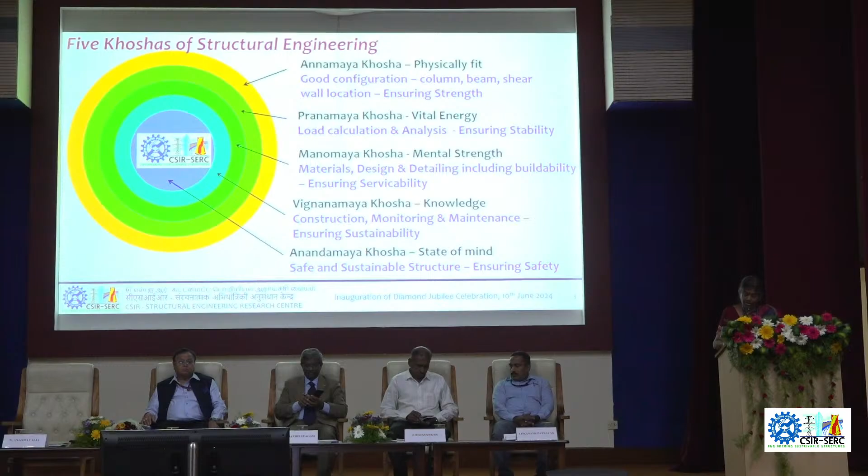Our aim and goal to provide safe and sustainable structures is the inner layer, which can be achieved through good configuration and by ensuring strength at the first layer, while load calculation, analysis, and ensuring stability form the second layer. It is important to ensure serviceability and use appropriate materials, design and detailing - this is the 3rd layer. It is essential to monitor and maintain the structures after construction so as to ensure sustainability. So these are the 5 layers of structural engineering towards achieving safe and sustainable structures.

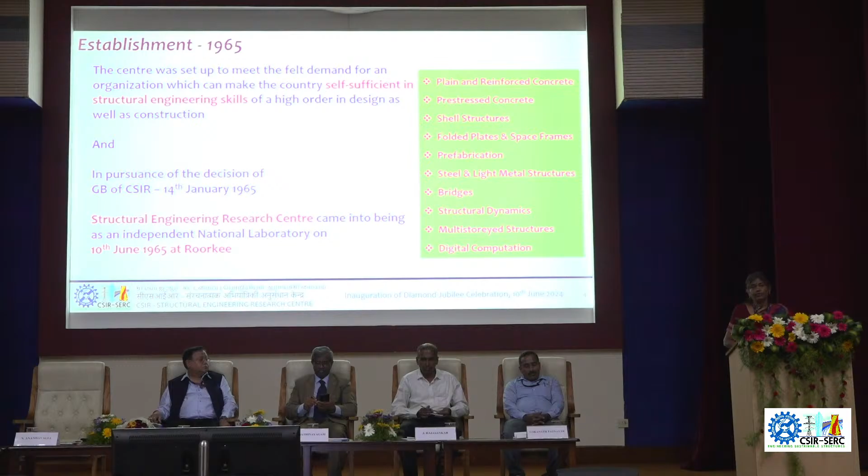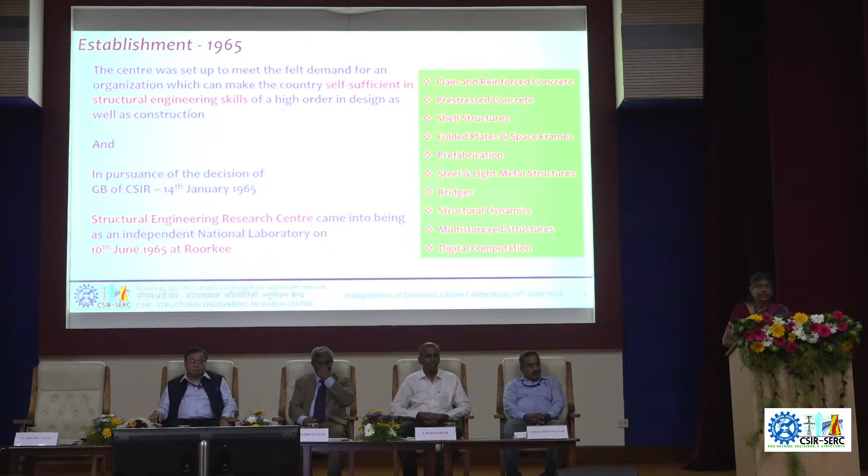As Dr. Bharati Priya was telling, the journey of CSIR-SERC started with the thought process of Professor G.S. Ramaswamy, our founder director. It was built upon a far-sighted vision with the aim to have self-sufficiency in structural engineering skills, and was established on the 10th of June 1965 as a national laboratory under the CSIR Ministry of Science and Technology at Roorkee.

It was felt that a regional cell in the southern part of our nation was essential, and it was established on this campus with other regional units of various CSIR laboratories in early 1969, and transformed into a full-fledged center.

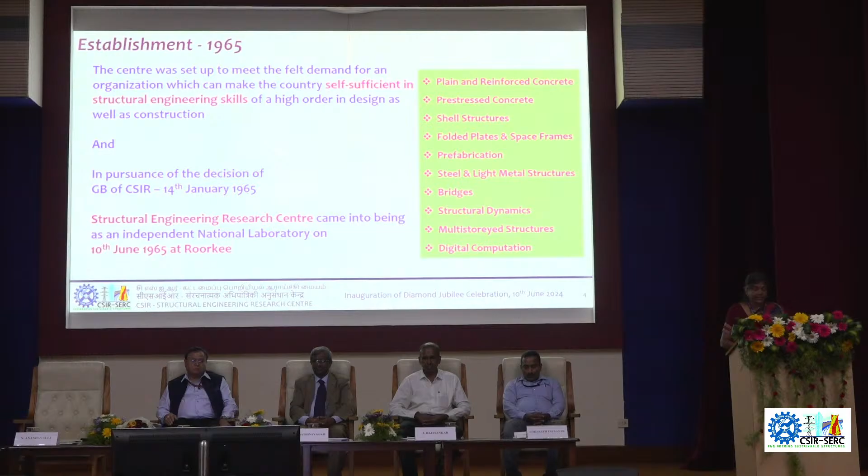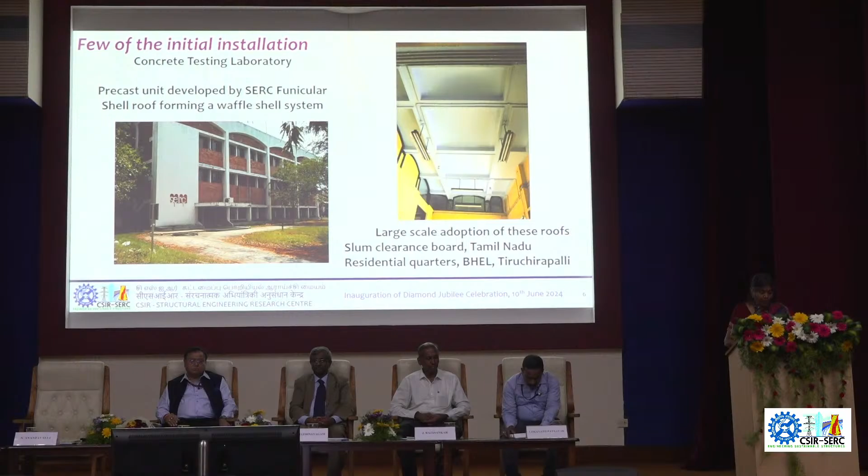Each of the structures in this campus has a technical story behind it. The first few buildings, such as the concrete testing laboratory, have a funicular shell roof developed by CSIR-SERC, and the heavy testing laboratory has a brick shell roof. The heavy-duty floor of this laboratory was reinforced with deformed grip bars, also developed by CSIR-SERC and commercially produced by Tata Iron and Steel Company, which generously donated 50 tons for this work.

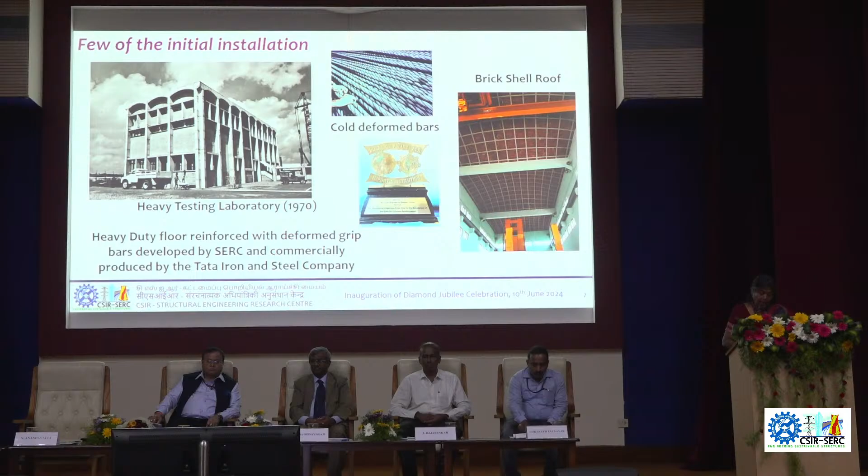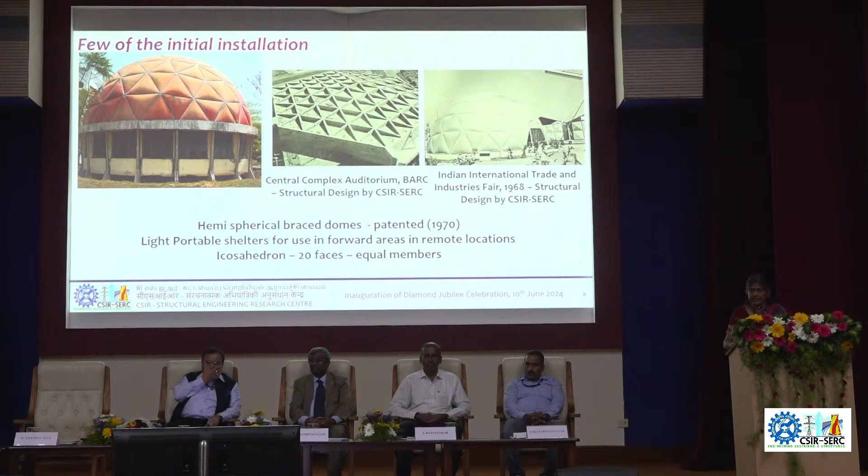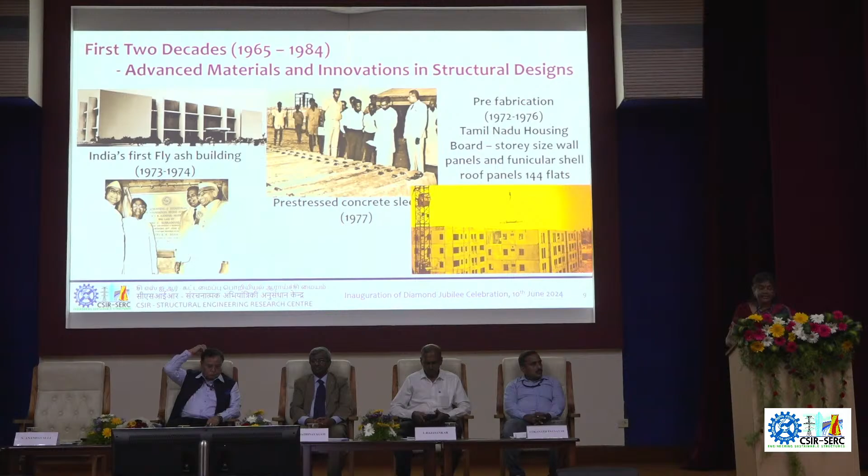Throughout the journey, CSIR-SERC has been contributing to solving structural engineering issues. To name a few: high-strength deformed bars aiming at import substitution, pre-stressed railway sleepers towards a green solution, India's first fly ash building with about 30% replacement of cement with fly ash way back in the 1970s, pre-stressed hyperboloids, and prefabrication in the early 70s.

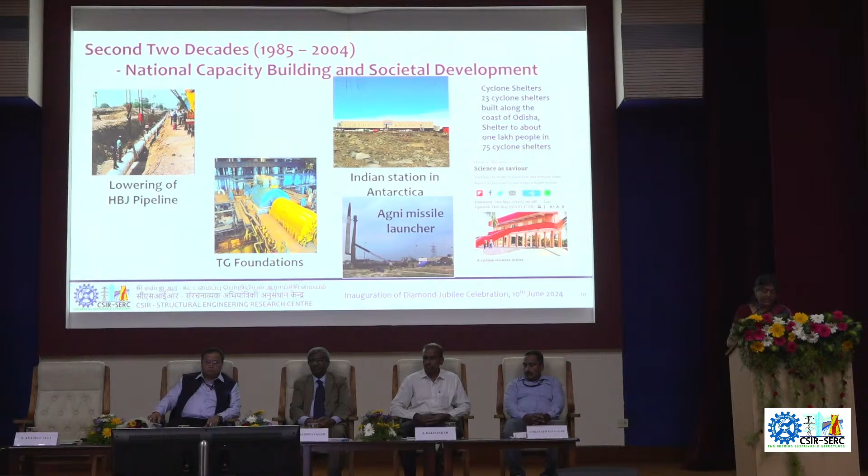In the second two decades, towards nation building and societal development, a few contributions include the aerodynamically shaped cyclone shelter adopted for the Odisha super cyclone—23 such shelters were installed, and they save more than 40,000 lives every year—as well as addressing various vibration issues of turbo generator foundations and lowering of in-service pipelines. In the next two decades, we concentrated on interdisciplinary research and development.

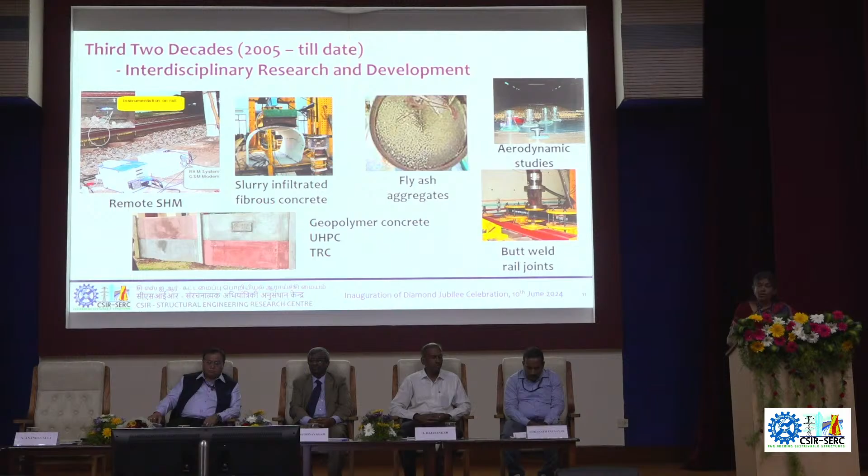In recent years, scientists of CSIR-SERC are focusing their research on six thrust areas, namely structural health monitoring, disaster mitigation, advanced materials for sustainable structures, special and multifunctional structures, offshore structures, and energy infrastructure.

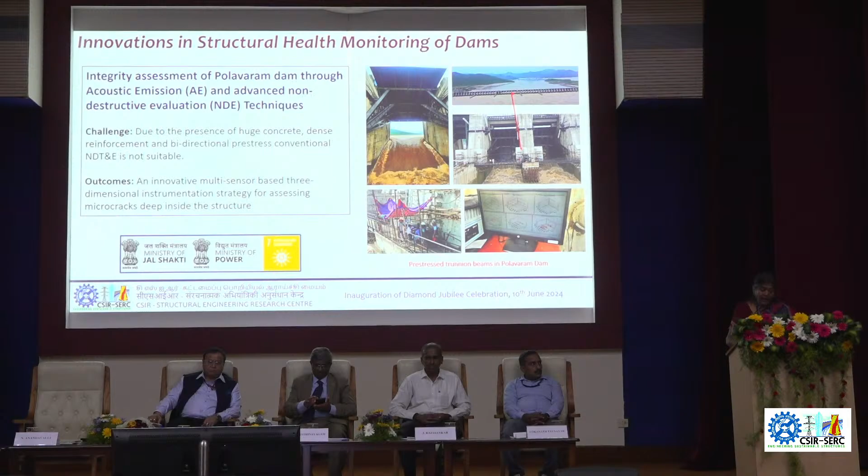Recent scientific and industrial contributions include integrity assessment of Polavaram Dam through acoustic emission technique and advanced NDT techniques, testing of LCH external auxiliary fuel drop tank, type designs of high capacity explosive storage structures, and development of indigenous emergency retrieval systems for power lines.

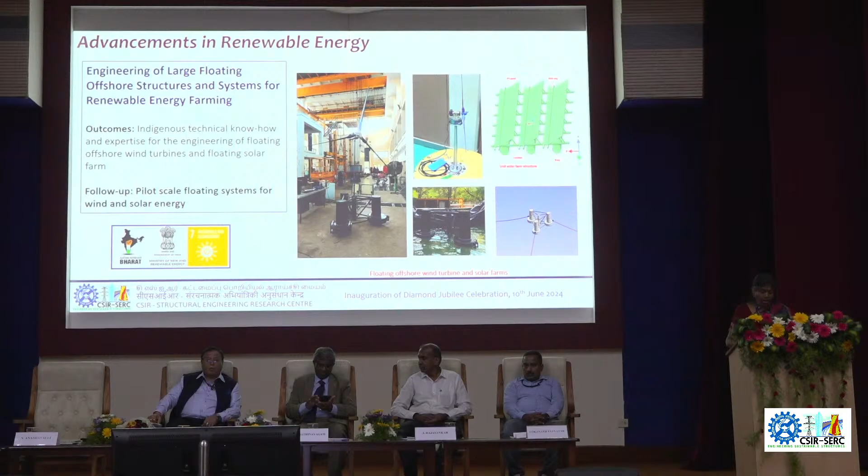Indigenous know-how on engineering of floating offshore wind turbines, floating offshore platforms, and solar platforms. Dissipative fuse links, textile reinforced concrete products, mathematical formulation of phase field method, 3D printable various concrete mixes including fibers, geopolymer, and ultra high performance concrete, condition assessment of RCC structures of Tapovan Vishnugad hydropower projects, and design of semi-buried hardened aircraft shelters.

A compendium of projects carried out by CSIR-SERC for various sectors is being released today.

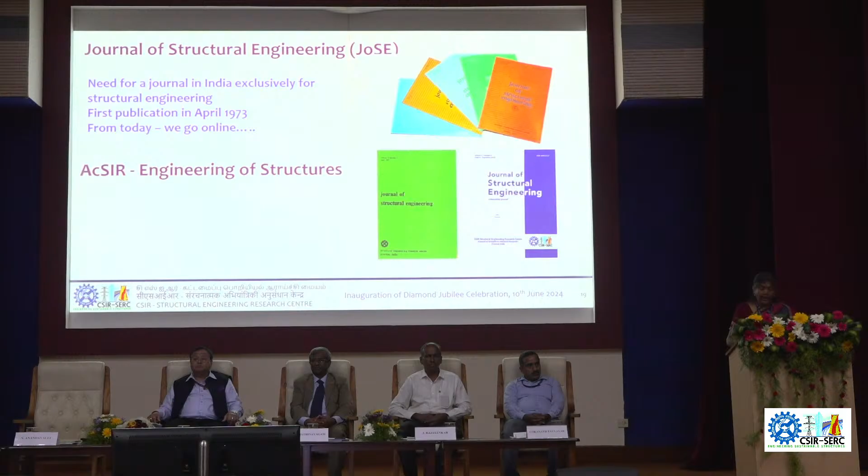I am proud of each and every member of my CSIR-SERC team. I am happy to share that 25% of the scientists, 60% of the administration staff, and 75% of the finance division staff are women. Today is a day as we cherish our achievements.

We need to put ourselves on a much higher platform so that we will become a global benchmark. We need to be competitive for ourselves.

My dear brothers and sisters of this campus, a person with far-sighted vision, Professor G.S. Ramaswamy, has founded this institution, and former directors Dr. Ramaya, Dr. Raman, Dr. Apparao, Dr. Lakshmanan, Dr. Nagesha Iyer, and Professor Santosh Kapuria, along with staff members, have made a strong foundation upon which we stand today. It is our duty to pay our gratitude to them by keeping the campus vibrant with our outstanding scientific contributions.

Thanks are due to Dr. R. Narayanan, Dr. A.P. Mandal, Sri Shyam Shetty, Dr. K. Ramanjaneyulu, and Dr. Rajashankar. We owe to our research council members for their broad R&D policy, guidelines, and directions from time to time. We acknowledge our clients and industry partners.

I'm confident with my smart people - simple and systematic, manageable and mindful, adaptive and active, realistic and resourceful, trendy and time-conscious - we will attain our pinnacle.

This year being the 60th year for our organization, we are planning a year-long celebration with various events. To commemorate, a logo has been designed and will be released during this function. As part of the Diamond Jubilee celebration, a conference on monitoring, assessment, and predictive maintenance of critical infrastructure, IMAP 2025, is being organized during January 22 to 24, 2025. The release of the conference flyer is also planned during this function.

Now we are in the renewable regime. India has set a target of 500 gigawatts of renewables by 2030, which is a very huge target. In 2014 it was just a mere 20 gigawatts, and they announced 175 gigawatts by 2022. But now, after COP26, the Honorable Prime Minister has announced 400 gigawatts, and now 500 gigawatts by 2030. That's the target of renewables, and we are fast tracking towards that.

Some of the structures you might come across in future would be offshore towers, floating and fixed, very tall wind turbine towers of 120 to 150 meters, and very large wind turbine blades, currently up to 60 meters in India, while in the world it is about 130 meters. India's largest floating solar project is in Kayamkulam, Kerala, one of the largest at 101.6 megawatts.

What are the challenges in traditional energy engineering? Why do we call it energy engineering? Any form of energy requires structures - pressure vessels, boilers, support structures, foundations, towers, and blades for wind turbines, and so on. Traditional energy structures had limited sustainability because resources are limited and resource dependent - fossil fuels will be depleted soon - and they have high environmental impact, causing high pollution on the ground.

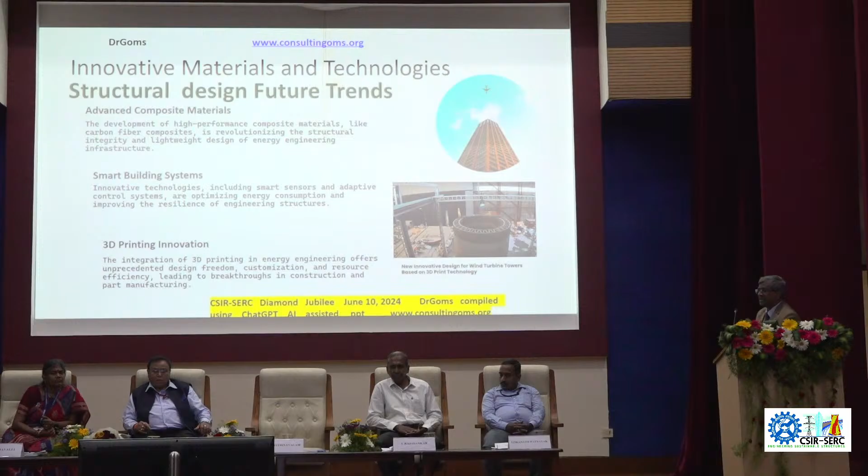Innovative materials and technologies in structural design for future trends - advanced composite materials are being used now, and smart building systems will be there because green buildings require embedded sensors in building materials, and net positive energy management of the building has to be ensured. 3D printing - SERC has already demonstrated 3D printing innovation at a small scale, and it will be in prototype soon.

Then we have energy efficient strategies. For green buildings and energy efficiency, you need support structures and sensor supports that function and meet all functional requirements, along with passive design solutions with low energy consumption, for which structural forms and design are important. Then we need IoT-enabled devices with embedded sensors, which will improve operational performance, easier maintenance, and energy engineering systems.

Above all, we need synergy from CSIR-SERC with the National Institute of Wind Energy, National Institute of Solar Energy, National Institute of Bioenergy under the Ministry of New and Renewable Energy, along with the International Solar Alliance, one of the topmost apex bodies in the world, headquartered in India. In future we need to ensure P2P, person-to-person energy sharing within connected communities, because energy will be digitally managed - no more analog distribution systems, it will be controlled by digital networks.

Offshore wind power developments are very fast. Most of the countries which are dominant in offshore wind energy exploitation have taken about a decade or so to set up their first offshore wind farm.

We also started in 2010 with offshore wind energy discussions with Scotland, and now we are in a position to release a tender for Tamil Nadu, 4 gigawatt, leasing 1 square kilometer of seabed for the highest bidder, for seabed survey, marine biodiversity surveys, and other related activities involved in offshore wind power development.

All the surveys have to be completed, seabed exploration done, and suitable foundations designed. We can think of one machine with 15 megawatts and a 236 meter diameter blade - that's such a long blade. One machine gives 15 megawatts. That's the order of scale of development nowadays.

This is a large wind turbine blade under test in Denmark, at the Blaest company. The testing happens in the ambient outside environment, and the vibrator simulates fatigue stresses on the blade to assess its fatigue life.

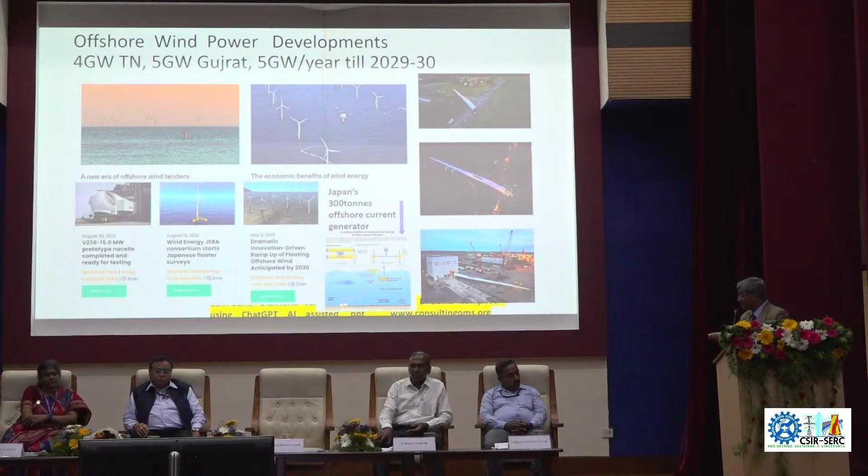Another important thing is, when you design the blade, it has to be designed for logistic transportation along roads, to be taken through a barge, and installed at a site in the offshore industry. So there are several things structural engineers have to think of even at the design stage.

Offshore wind farms cannot be accessed as and when required to rectify defects. They have to be very highly reliable, and access is limited because it is seasonal - you have to wait for the sea to be calm before addressing a defect, or go through a helipad and so on. So digital twins is going to solve these overall problems.

Future outlook includes emphasis on energy decentralization through microgrids - we'll come to that in the next few slides - and integration of AI and machine learning in predictive energy management, smart grids, and so on.

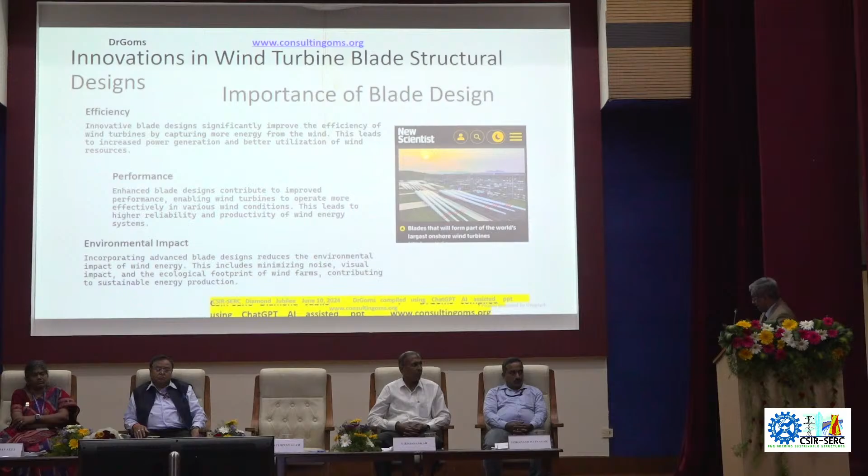Innovations in wind turbine blade structural designs largely depend on structural engineers building in efficiency in the blade, aerodynamic design, as well as structural design. With high performance, you get more energy captured, and the environmental impact will be less because noise will be reduced and bird or bat deaths will be fewer. Other challenges in traditional designs, like fatigue and manufacturing complexities, are now being overcome with innovations.

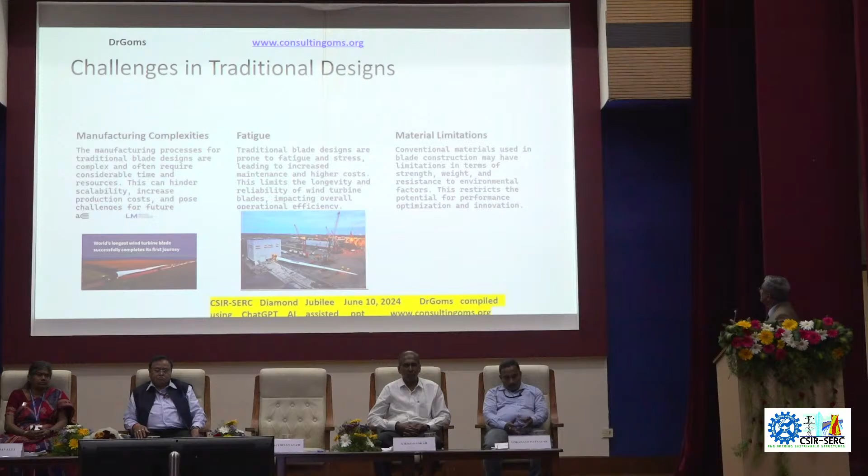Conventional materials used for blade construction may have limitations in strength and weight, and nowadays we are using carbon fiber material advancements, smart polymers, and morphing of blade profiles inspired by large sea animals and aerodynamic bird wings. Design enhancements integrate both technologies and digital manipulation of stresses in the blades - you can embed fiber optic sensors inside the blade during casting and monitor it 24/7.

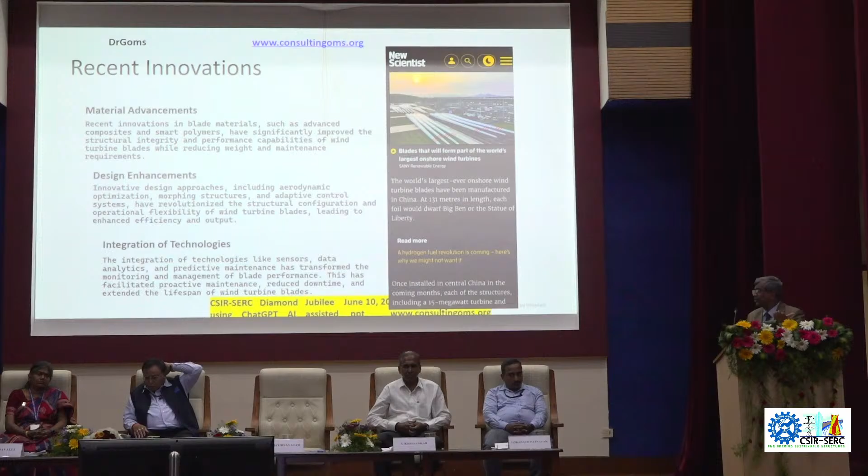These are all the gains you'll get from such innovative designs: if you use advanced composites, the performance increase is about 12%. Morphing blades can increase performance by 18%. Smart polymers can increase performance by 15%.

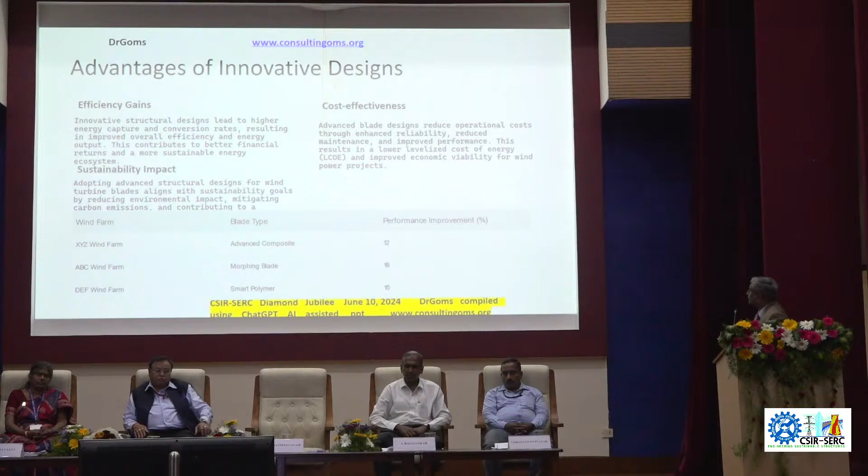So structural engineers have a large role to play in the future, not only in blade design and efficiency building, but even after the end of life use of the blade. Denmark has showcased how you can repurpose end of life blades into bus shelters, through integration and collaboration. This will be coming in the future, and it also requires structural qualification, because it involves the public being sheltered in these bus shelters.

Then there are challenges in traditional support systems.

Onshore, we have seen the height will be limited, the length of the blade will be limited to transfer through rural roads. Offshore, that limit will be obviated, because you can create in the factory coastal area and unload any size of the blade, any size of the tower, any weight of the nacelle onto the barge and go to the site to install and commission.

So all these sustainability and environmental impacts must be addressed. In India, there is only one or two companies supplying tall reinforced concrete towers for wind turbine supports, but there will be 30% cost saving than steel. You can build and reuse concrete towers built in forests, because you can take only the materials without cutting trees, then erect an in-situ or precast concrete tower. The same tower can be used when you want to upgrade the machine, because its life is durable and long lasting. So 30% cost saving there.

Beyond 70 meters design, it could be 30% saving. Then enhancements in offshore wind turbine supports - we need factories on the coast so that you can load out like 3,400 tons topside, which is a substation, supported by 1,400 tons of jacket. It should be corrosion resistant, and floating platforms are also going to be used. Adaptive foundation systems like friction bucket and suction bucket systems will adapt to the seabed shape automatically. All those things are going to be the challenge.

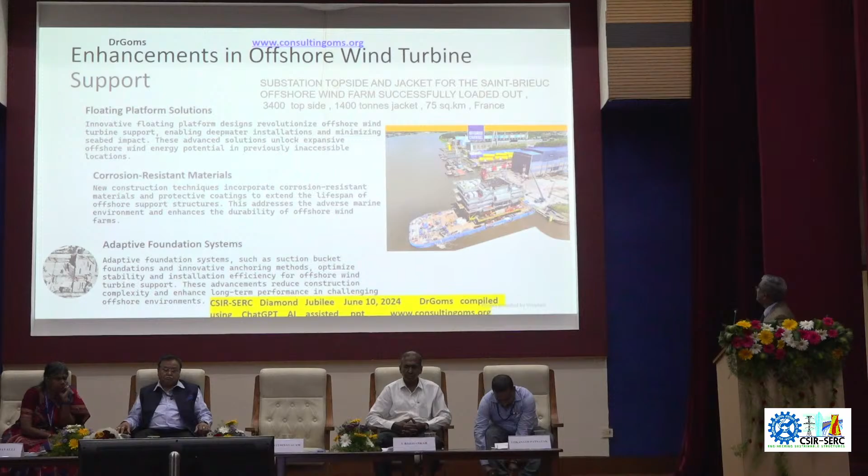Onshore, offshore support design flexibility - you are limited by land availability, but adaptable for deep water in the case of offshore support. Construction costs are lower initial cost in the land, but higher initial cost offshore, though the potential yield is much higher. 10 to 20% more energy can be captured offshore, because it is a smooth surface, not a turbulent wind during energy production.

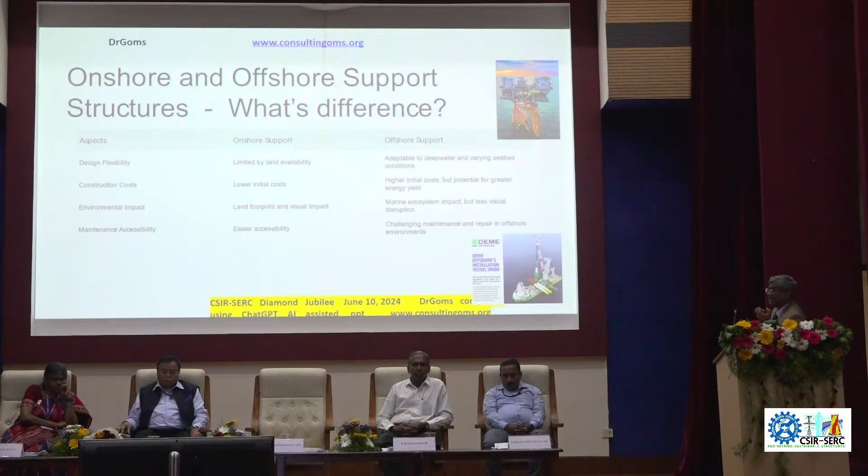Not during cyclones though, it is not possible. Beyond 25 meters per second wind, most wind turbines will be stopped to resist the extreme wind. Maintenance accessibility is easier on land, but highly challenging in offshore. That means you have to build a lot more reliability through digital twins, IoT, ICT and so on.

And there are many features. I will leave the slides with you to read because of the short time limitation. I'm rushing through the slides.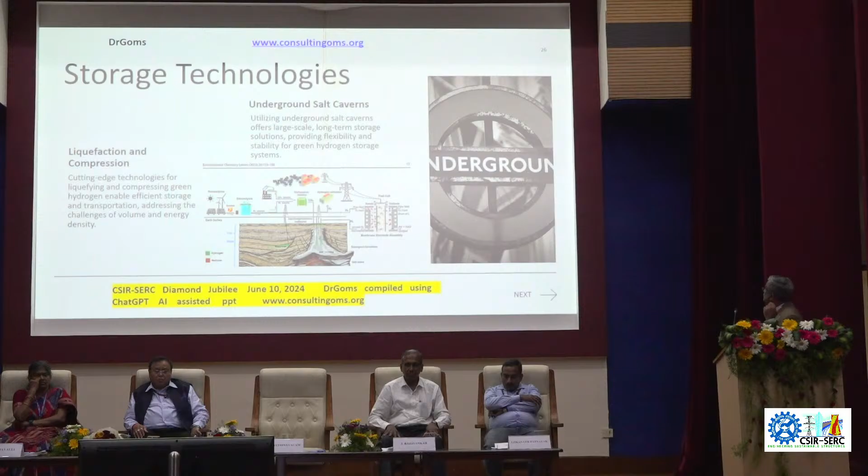And transportation innovations: hydrogen can be transported continentally by storing in liquid form, just like petrol. I just want to remember, hydrogen is not a fuel, it is an energy carrier. When you convert in terms of renewable energy, it is only a carrier. It can be stored and transported everywhere.

Okay, when it comes to these kind of structural engineering systems, we need head of service operations, head of learning and development for industry, head of supply chain, then head of environment, health and safety, quality, SCADA system, and head of technology. For all that, in energy engineering projects, we need competence of the people. That's what SERC is already doing periodically through advanced training in very highly multidisciplinary areas of structural engineering. And we need this because ICT, IoT, Industrial Internet of Things, digital twins, blockchain, AI, machine learning, virtual reality, augmented virtual reality, you can name the new technologies that are going to come up with all this. Structural engineering is merged with every discipline, and it has a multidisciplinary approach. We need to develop the people.

Finally, I acknowledge the resources, including ChatGPT, which helped me form the first profile. And I thank CSIR-SERC for giving me this golden opportunity to address you all, to interact with you. Thank you.

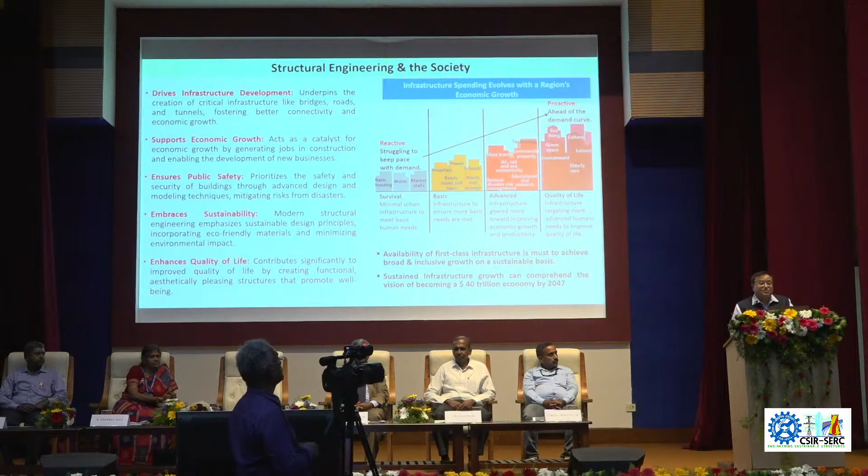And it is a catalyst for economic growth, because when you do economic growth, you generate jobs and construction activity, new businesses are generated. We are all talking of safety because it ensures public safety - all the buildings, all the towers, everything has to be risk-free, so we have to safeguard against disasters. The other point which Dr. Gomathinayagam mentioned was the law of sustainability. Today we are all talking of sustainable development, and hence modern structural engineering emphasizes sustainable design principles, and obviously it enhances the quality of life. But the approach we are talking about evolves with the regions of economic growth.

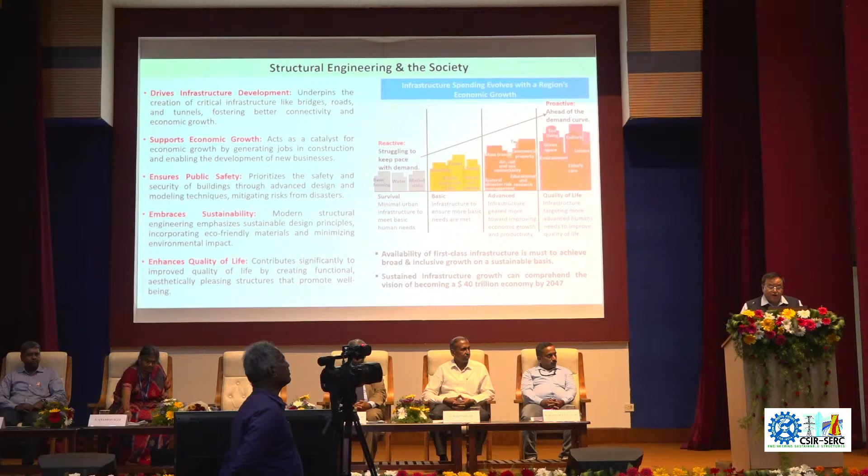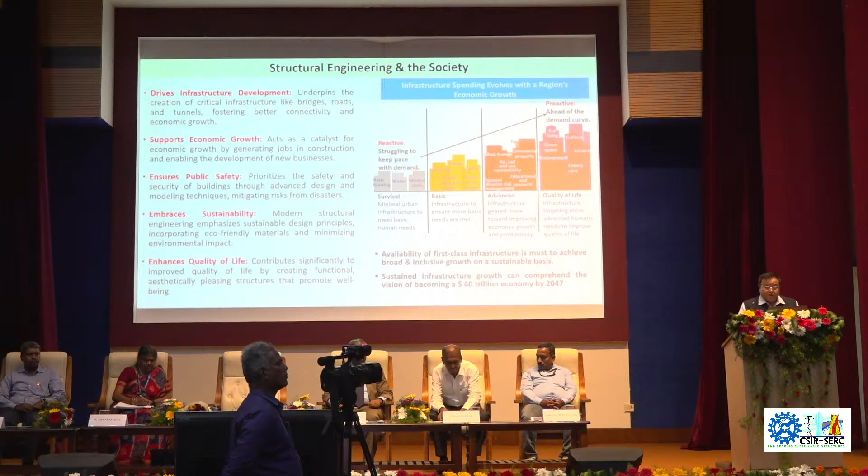We have once upon a time the reactive approach where we were struggling to keep pace with the demand, where minimum urban infrastructure to meet the basic human needs used to be our requirement. So we were looking at basic housing, water, market and so on. Then we moved from basic infrastructure to ensure more basic needs like hospitals, schools, roads, buildings and sewage. Then came advanced infrastructure geared more towards mass transportation, metros, air, railways, natural disaster risk-free systems, educational and research institutions, and so on.

And now we are all going into the proactive mode where we are looking at eco living, culture, leisure, and environment in a big way, which is the quality of life. So availability of first-class infrastructure is a must to achieve broad and inclusive growth on a sustainable basis. Sustained infrastructure growth can comprehend the vision of becoming a 40 trillion economy by about 2047.

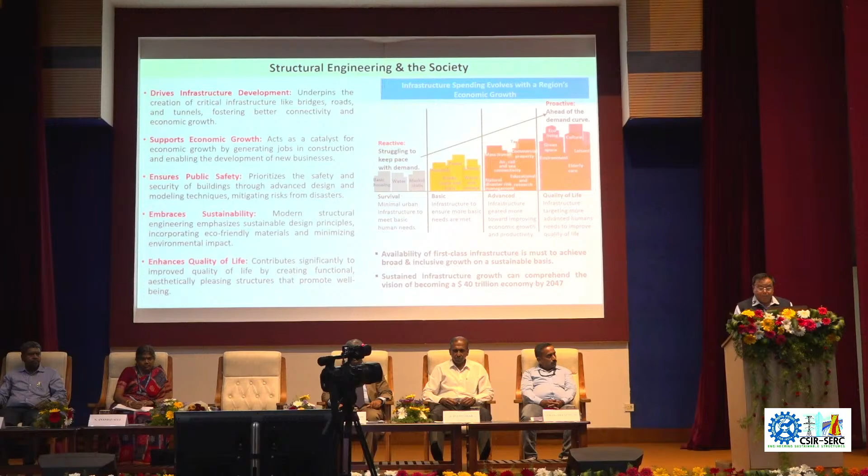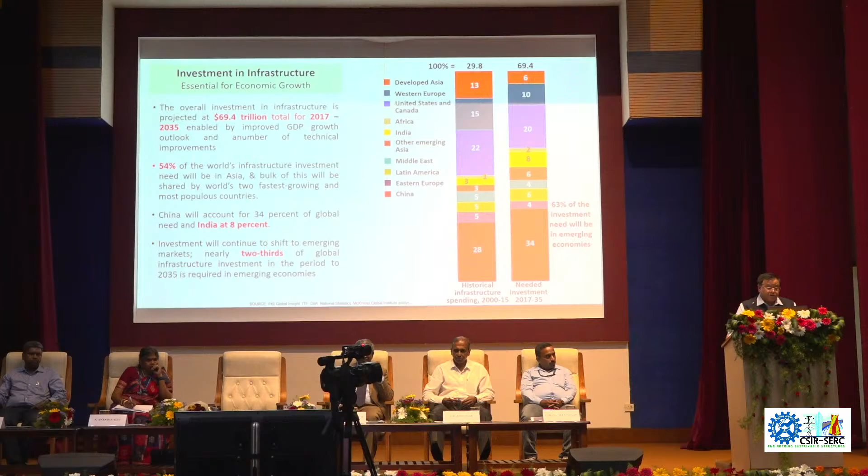So what is the kind of investment taking place today in the infrastructure segment, which is essential for economic growth? The overall investment is about $69.4 trillion between 2017 to 2035. 54% of the world's infrastructure investment will be in Asia, and the bulk of this will be shared by the world's two fastest growing economies, namely China and India. India will be about 8%, whereas China will be about 34%. Nearly two-thirds of the global infrastructure investment in the period to 2035 is happening in the emerging economies.

The two bar charts you are seeing on the right indicate what percentage is happening in Asia, Europe, India, US and so on.

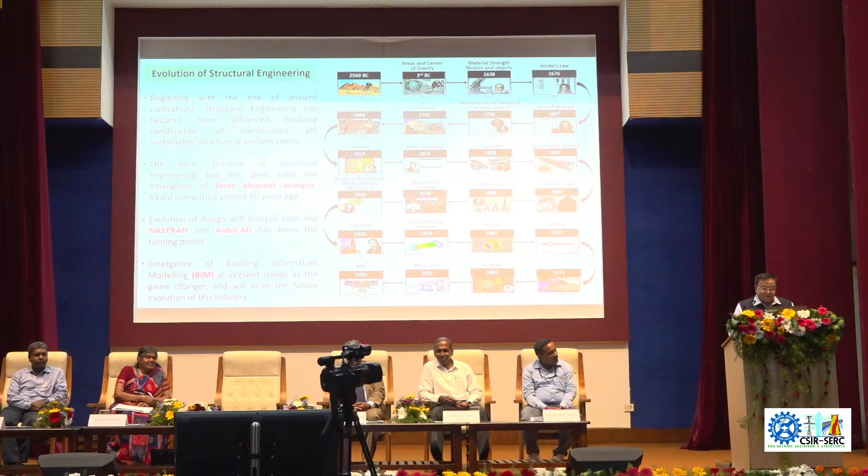So 1956 we started using cast steel, and that was the year the finite element methods came. 1956 was the year when I joined as a 6th grader or 5th grader in my school - of course I didn't know what FEM was at that time. Then 1965 was the time I was doing my engineering, and Nastran came. 1969, I think my final year of engineering, we started hearing about Nastran at that time, not using it.

But today we have a variety of things which we started using as practicing engineers - in DRDO, 1982 AutoCAD, then Midas Civil in 2001, and today what we have is Building Information Modeling, BIM, which is the latest happening today. So with the rise of ancient civilization, all this has happened - FEM, AutoCAD, Nastran, BIM - they are all recent advances in structural engineering methods and technologies.

If the construction is taken as one of the major areas, we have accelerated and disturbance-free construction methods which have evolved now. We have additive manufacturing - Dr. Gomathinayagam did mention about 3D printing, which is a form of additive manufacturing. Automation and robotics, BIM and augmented reality, and lean construction - all of us are looking at lean construction today, not a very heavy construction. And digital collaboration tools, he also mentioned about it.

The structure today is hybrid structures, with a high degree of prefabrication taking place. New structural systems are evolving now, new connection systems are also happening. Floating structures are emerging, which was again highlighted by Dr. Gomathinayagam, and lightweight structures, which is happening today. Materials are playing a major role.

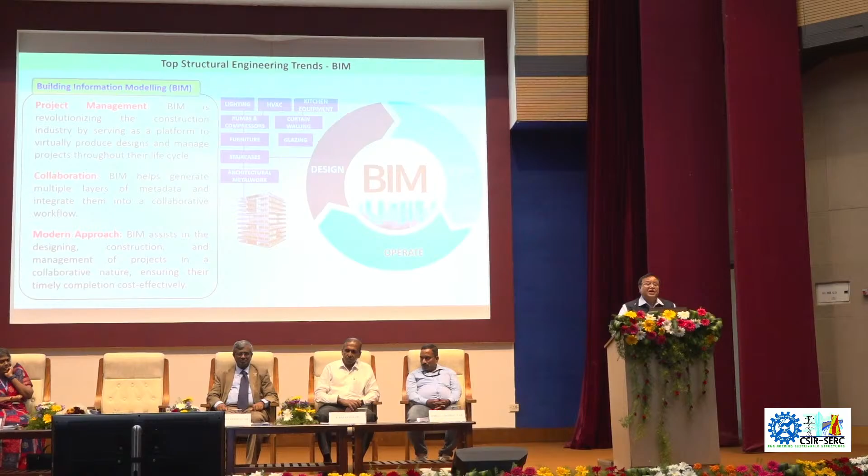The top structural engineering trend today is what we call building information modeling. I don't know how many of you have started using this as a part of your exercise, but project management is revolutionizing the construction industry by serving as a platform to virtually produce designs and manage projects through their life cycle. And collaboration - BIM helps generate multiple layers of metadata and integrate them into a collaborative workflow.

Then the modern approach assists in designing and management of projects in a collaborative nature. I think design, build and operate - this is the kind of mantra which is needed, which involves right from the architecture to furnishing to lighting, everything that is required in any building or any structure has to be taken care of.

So let us just talk about what is a structural health monitoring system. In aerospace, I come from aerospace area, so we used to do the structural health monitoring of aerostructures. And we developed our own specific methods of doing that. And when I was preparing this talk, I found there are lots of similarities to what is being done here.

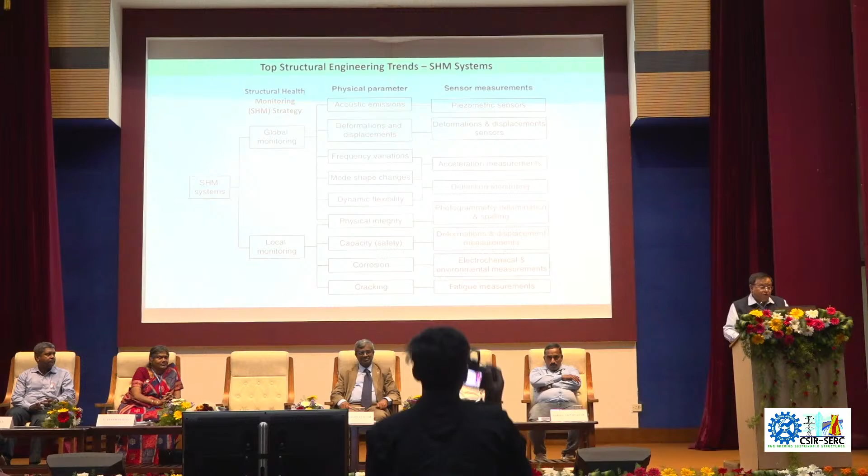You have the structural health monitoring strategy, which could be a global monitoring strategy or a local monitoring strategy, which depends upon what physical parameters you are wanting to measure and what sensors are associated for making the measurements.

For example, for acoustic emissions, you use piezoelectric sensors. For deformation and displacement, you use deformation displacement sensors. For frequency, mode shape and dynamic flexibility, you use acceleration measurement or deflection monitoring. For physical integrity, you use photogrammetry, and for delamination and spalling, corrosion - electrochemical methods and so on.

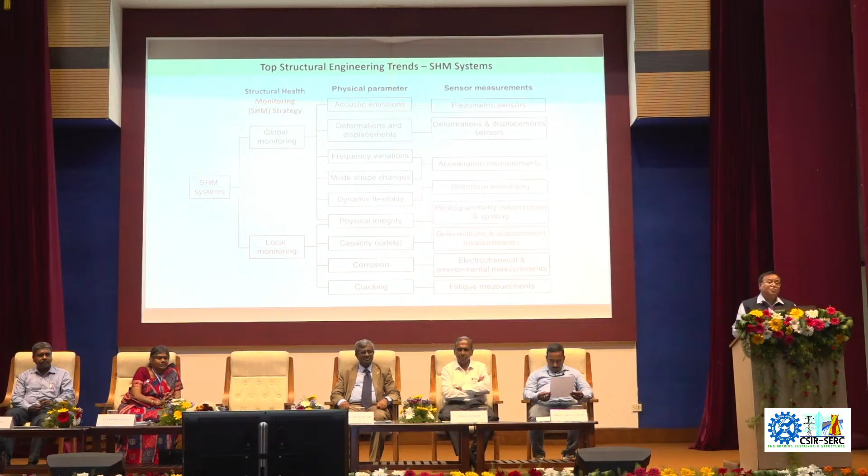So these are the systems which are to be integrated and they become part of your SHM process.

Application today in all this is going to be mainly through artificial intelligence. AI can enhance structural health monitoring by two methods: number one, image-based SHM, like I mentioned to you, and the vibration signal-based SHM.

If you take inputs from somewhere, whichever structure you are taking, then you put it through a machine learning method where you have done supervised learning or unsupervised learning, or reinforcement learning, and then you get the output that would be sent for that.

So all these challenges - streamlining the processes, there are new ways to tackle them. Generative design revolution: AI-driven algorithms can actively generate multiple design options, accelerating the design process by producing innovative solutions. AI-enhanced simulation and analysis certainly leads to smarter, quicker, and more accurate outcomes, and collaborative tools can help all stakeholders brainstorm ideas, offer design suggestions, and predict potential challenges.

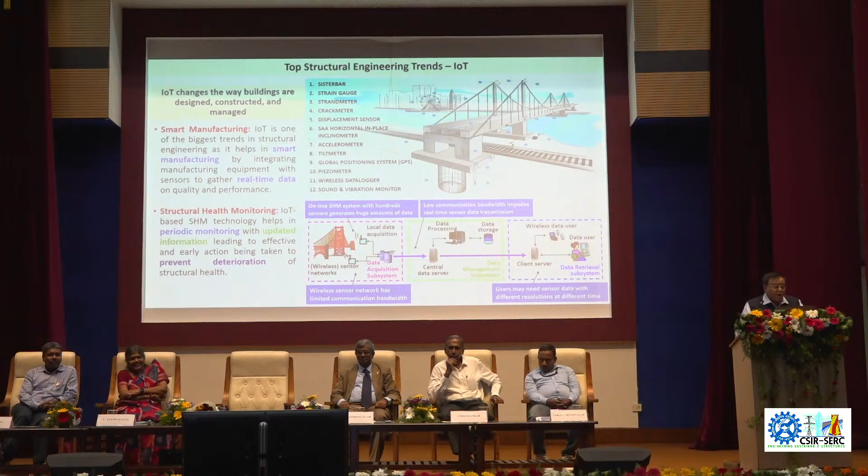Now, there are top structural engineering trends. Dr. Gomathinayagam did mention about IoT. It changes the way buildings are designed, constructed, and managed today. Basically, if you look at this kind of a structure, what I have shown, IoT changes the way buildings are designed, constructed, and managed. This is one of the biggest trends in structural engineering.

It helps in smart manufacturing by integrating manufacturing equipment with sensors to gather real-time data on quality and performance. And structural health monitoring certainly helps you with periodic monitoring with updated information and prevents the deterioration of structural health.

Now you can use sensors like strain gauge, strand meter, crack meter, displacement sensors, and so on. From all these sensors you get data as shown here. You get the local data, which you can transmit wirelessly or via wire. If it is wireless, you get into what is called the bandwidth problem. And finally it goes to the data management system, where you have a central data server with a data processing unit and a data storage system, and finally to the client server where the user sits to make use of the data. This is the kind of SHM configuration which will be useful for all structures.

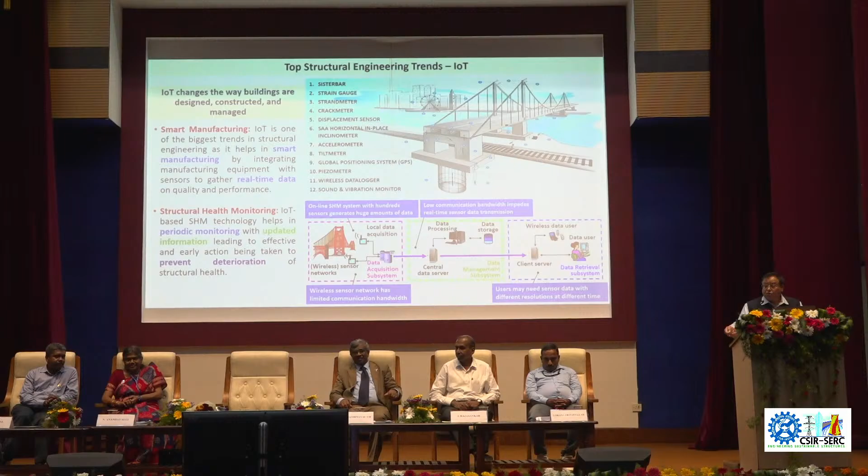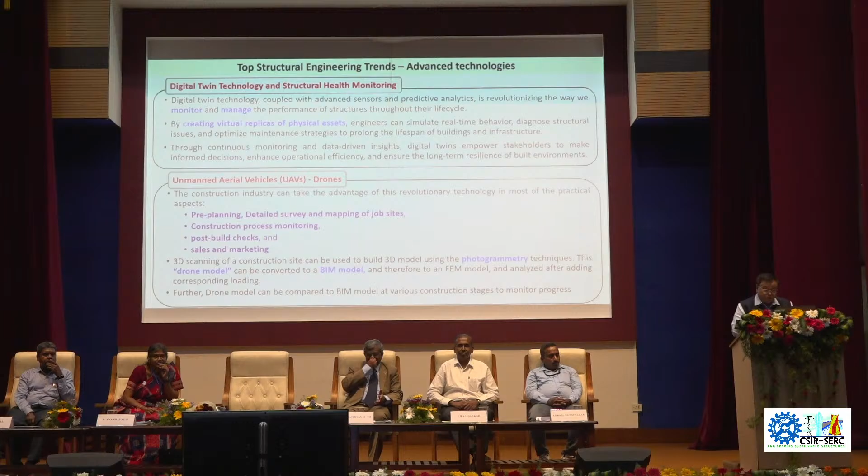Unmanned aerial vehicle drones today give the advantage of this technology in the most practical aspects, like pre-planning, detailed survey, and mapping of the job site. Particularly for offshore work, what Dr. Gomathinayagam was talking about, we need drone technologies there, and we will be using them extensively for post-build checks, sales and marketing, and 3D scanning of the construction site. Using photogrammetry techniques, a drone model can be converted to a BIM model and therefore to an FEM model, and analyzed after adding corresponding loading data. This is the way we will be in a position to use all these technologies.

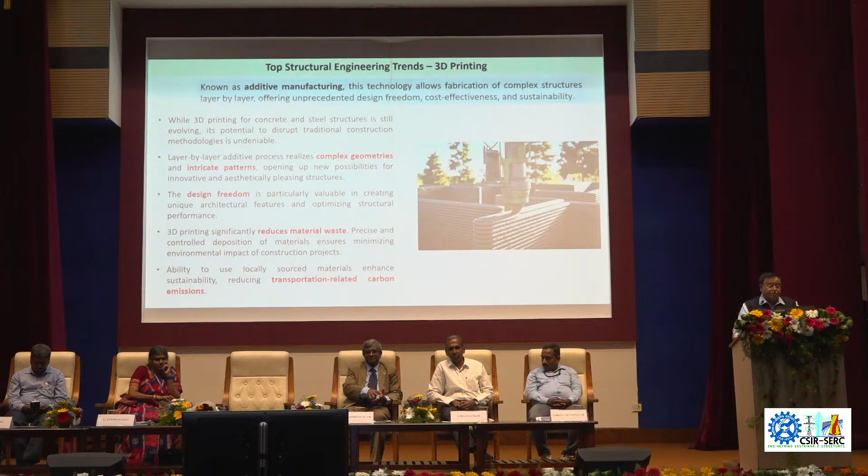Now, another one is 3D printing, also known as additive manufacturing. It allows fabrication of complex structures, layer by layer, offering unprecedented design freedom. It can be done in concrete and steel structures, although concrete and steel are still coming up, but other materials have already come up in a big way. The layer-by-layer process can give complex geometries and intricate patterns. It gives you design freedom, reduces material waste, and also allows locally sourced material to be used, which reduces transportation-related carbon emissions.

Another material commonly used in structural applications now is composites. Composites are a combination of two or more physically distinct phases that give properties different from their constituents. So when you need high strength-to-weight ratio, high durability, damping properties, design flexibility, chemical resistance, corrosion resistance, or high impact strength, you can get all of them through composites.

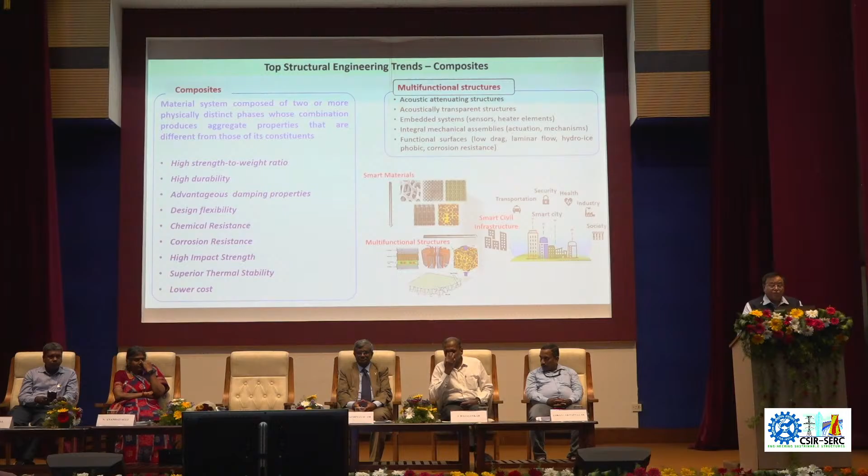Multifunctional structures can give you acoustic attenuation, acoustically transparent structures, embedded systems with sensors, heaters and heating elements, and integral mechanical assemblies like actuation systems put inside. Functional surfaces, for example on wind turbine blades, can provide low drag, laminar flow, hydro-ice-phobic properties, and corrosion resistance, all feasible with these functional structures. Basically, they are all part of today's smart city systems using smart materials and so on.

What are the new and sustainable materials emerging today? For example, aerogel is a super insulating material made from silica, lightweight, and used to insulate walls, roofs and floors. Bioplastics from renewable sources are sustainable alternatives to traditional plastic used to make building materials. Cross-laminated timber is made by gluing together layers of wood. By the way, I want to tell you about the great amount of change taking place in structures with the use of bamboo wood.

Recently in Bangalore, we constructed a full auditorium made out of bamboo wood. No steel at all, and all the joinery was done by carpenters using bamboo wood, designed for housing almost 300 people inside. Except for the plinth, which is made out of concrete, nothing else is there.

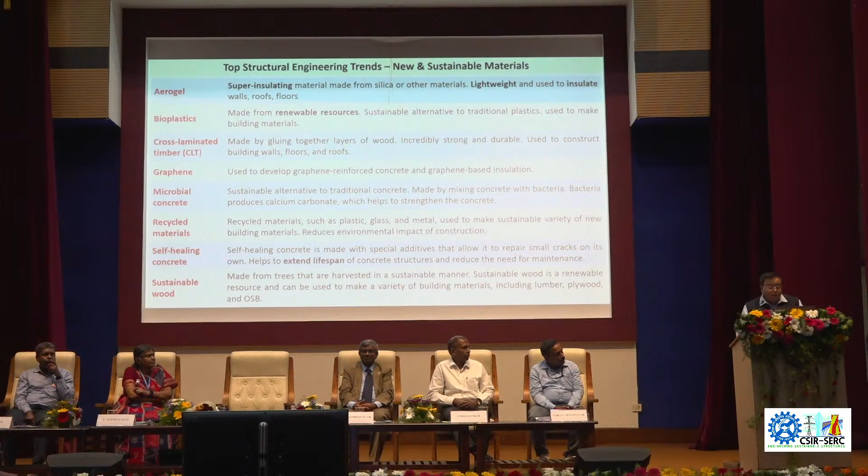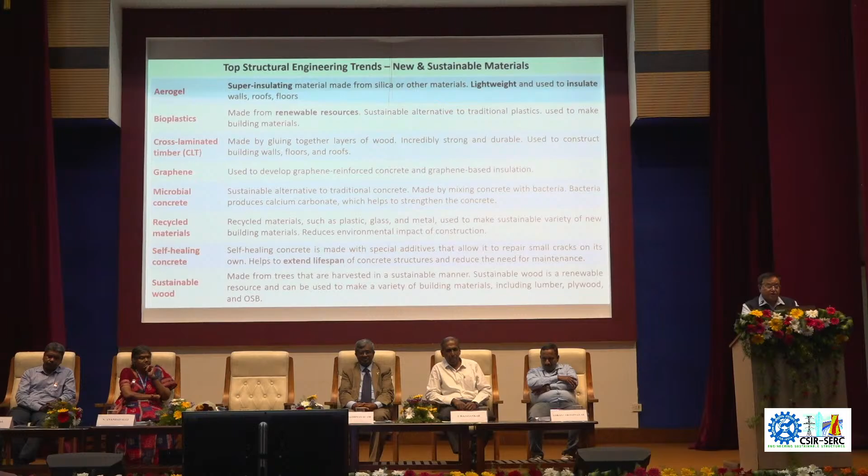I think what we are going to use are new technologies coming up in terms of wood, graphene reinforced concrete, and microbial concrete, where concrete with bacteria produces calcium carbonate which helps with strength. Recycled materials, we talked of fly ash. Self-healing concrete, and now we are also talking of steel slag, which is being used today for roads. Your own CSIR lab is doing that wonderful job. These are some of the materials which are making the difference in the years to come.

Other methodologies in structural areas are visual programming and parametric modeling, which involve creating algorithms and design logic through graphical interfaces, making it more accessible for engineers to manipulate parameters and generate complex parametric models. There's the ability to see the impact of changes in real time, which enhances the iterative design process, reduces errors, and accelerates the transition from design to construction.

Similarly, the next one coming is prefabrication and on-site fabrication. In the case of metro construction, you must have noticed the kind of prefabrication being used today. The advantage is that it reduces waste, increases efficiency, reduces construction time, and allows for better project management.

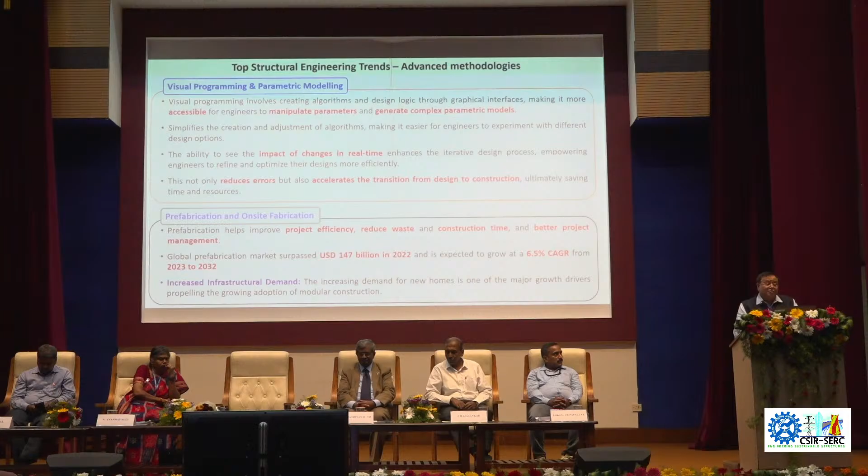The global prefabrication market surpassed US $147 billion in 2022, with a CAGR of almost 6.5%. An increase in infrastructural demand is coming up today in this sector.

Another one is the design aspect, where we are now looking at performance-based design, which is the approach of starting from the end to the starting point, and then using analysis, modeling, and simulation to demonstrate that a structure will meet a specific performance level.

PBD focuses on achieving a specific performance objective for structures, considering factors such as safety, functionality, and resilience. It enables us to design to meet project-specific goals, adapt to evolving challenges, and we can also look at seismic loads and wind loads through this process.

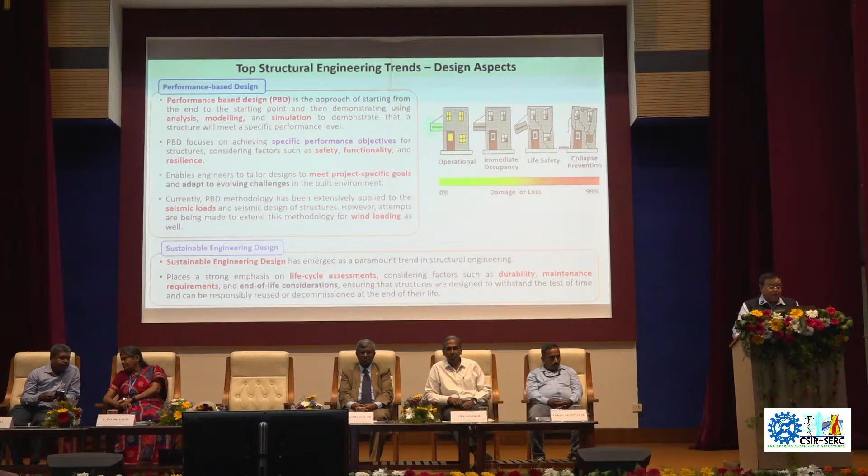Another one is sustainable engineering design, where we look at life cycle assessment, durability, maintenance requirements, and so on, which is part of our design process.

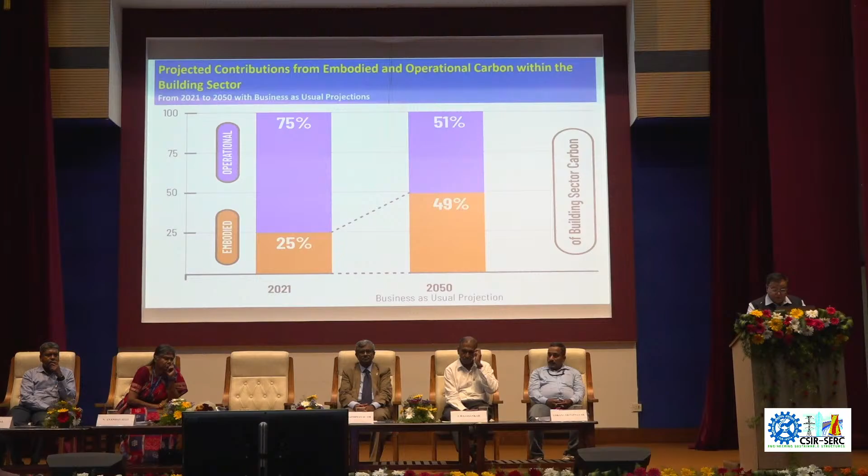The projected contribution from embodied and operational carbon within the building sector: when we generally project the contribution of various sectors to the carbon budget as far as the country and globe is concerned, buildings come fourth. First is power, second is transport, third is industry, and fourth is building. We are also contributing significantly to the carbon budget. In 2021, it was 25% embodied and 75% operational. It's expected that by 2050, with business as usual, it will be 49% and 51% of building sector carbon. That means we have to do something, otherwise we will be one of the contributors to global warming.

So there is a need for sustainable designs. Biomorphic architecture, inspired by natural forms and processes, is required. By mimicking the efficiency and adaptability of natural systems, we can optimize resource utilization, improve energy efficiency, and mitigate the environmental impact of construction projects.

Similarly, adaptive and responsive structures dynamically adjust their form and performance to respond to changing environmental conditions, utilizing smart materials, sensors, and actuators. Adaptive structures can autonomously adapt their shape, stiffness, and other properties to optimize energy efficiency, occupancy comfort, and structural integrity. These take the form of shape-shifting roofs that respond to wind loads. They are called interactive architectures.

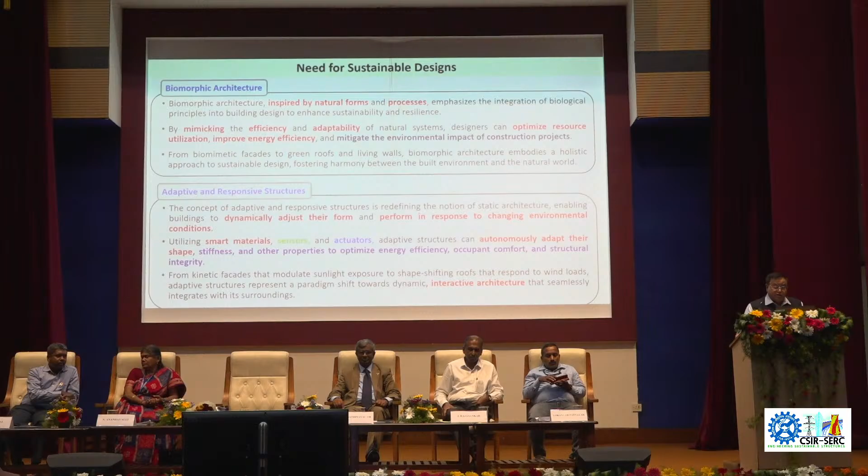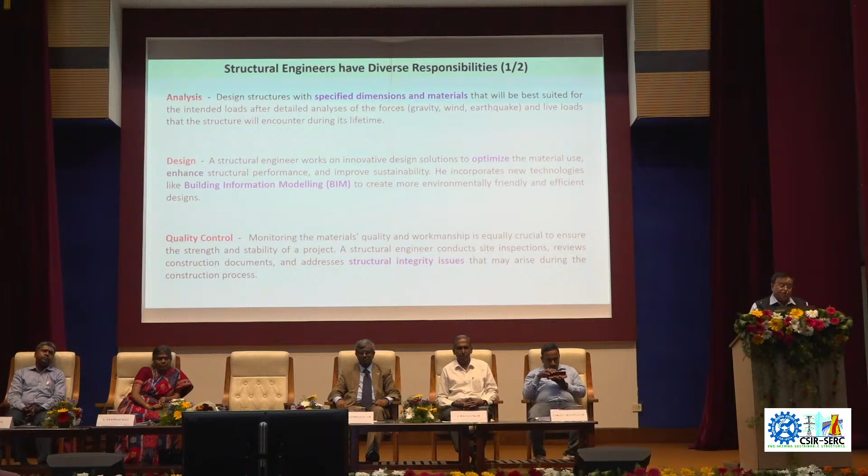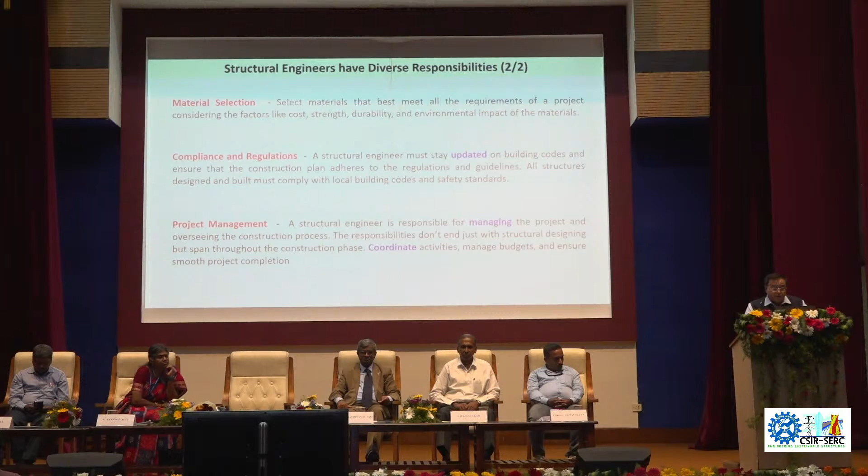And finally, what Dr. Goumati Nayagam talked about in detail is project management. Because if you want any infrastructure project to be cost effective and efficient, I think project management is the key word. We need to look at that seriously, and we should become good coordinators, because there are various segments in which you will be doing the coordination.

So what are the challenges in structural engineering for building the future? First is sustainability and environmental concerns, for reducing the carbon footprint. Second, we have aging infrastructure. We have seen what was built in 1965 or even earlier. Those buildings, structures, bridges, roads, and towers all need attention. How do we grapple with the idea of looking after this aging infrastructure?

Then we have another requirement: resilience to natural disasters. And the frequency of these natural disasters is increasing, all of us know. The number of cyclones every year has increased. Global warming is causing rising sea levels, so flooding is taking place. Chennai is no exception to that. So advanced modeling and analysis techniques are needed for predicting resilience to disasters.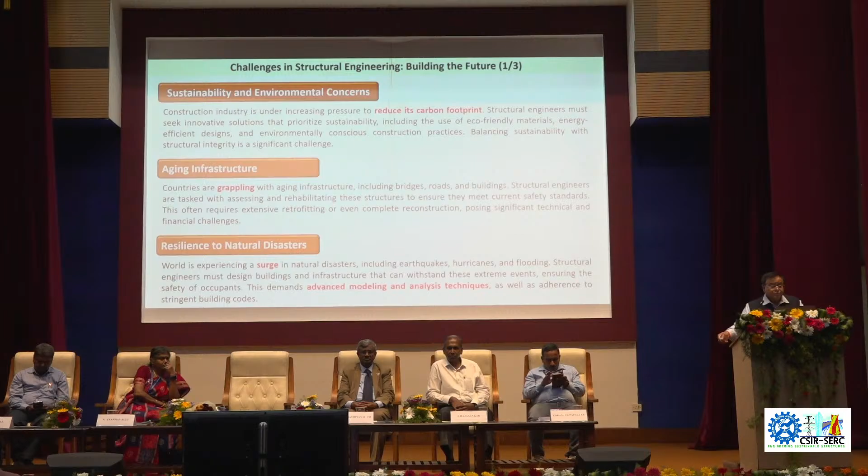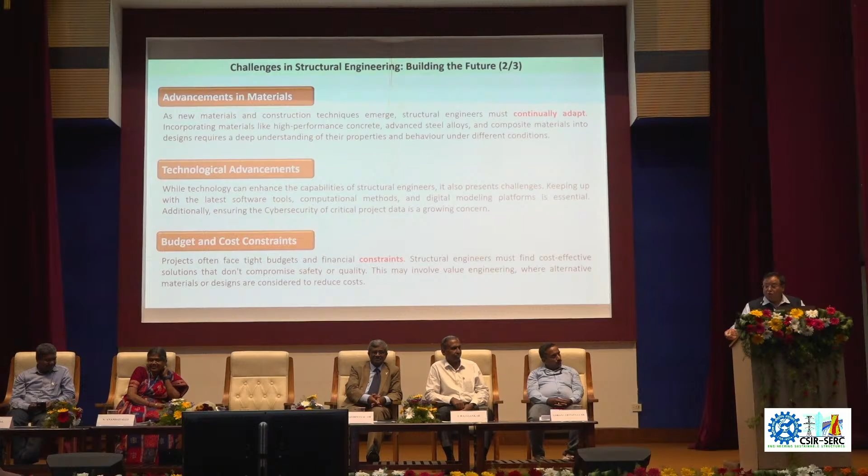So it is important. And of course, you always have a requirement to handle budget and cost constraints. It's always the case that when you make a DPR, you ask for 5,000 crores and the government will give you 4,000 crores. And you have to do that job in 4,000 crores with the same specification and same efficiency. So you know how important budgets are for this.

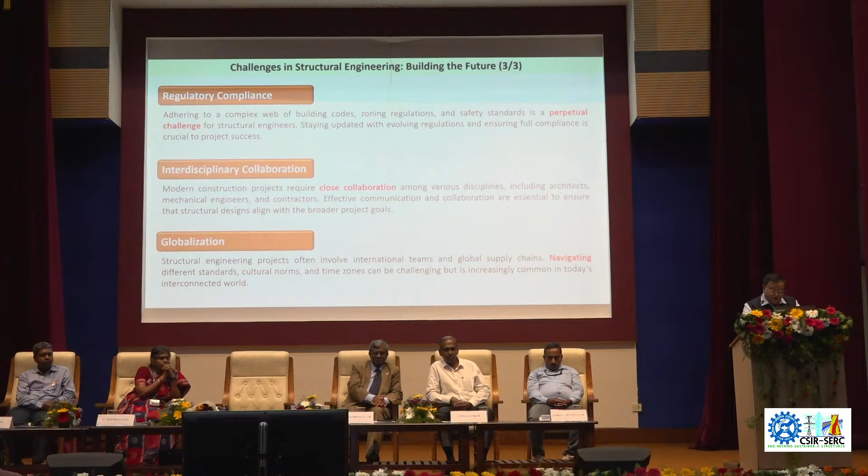And globalization: navigating different standards. You are not doing this just for yourself. Tomorrow you are going to build a structure in Bangladesh or Nepal, for that matter. So you need to navigate the standards of different countries, their cultural norms, their different time zones, and so on.

So to conclude, I will say the way forward for you is that the field of structural engineering is constantly evolving, with new technologies and materials being developed all the time. This is leading to new and innovative ways to design and build structures that are more efficient, safe, and sustainable. The use of new materials, computer-aided design, building information modeling, advanced technologies, and the focus on sustainability are just a few trends shaping the future of structural engineering.

As these trends continue to develop, structural engineers will need to adapt their skills and knowledge to meet the challenges of the 21st century. Other factors likely to have a significant impact on the future of structural engineering are increasing urbanization and the need for more resilient and sustainable structures. Looking ahead, it is imperative for structural engineers to stay abreast of these trends, ensuring they stay competitive in this dynamic and ever-changing engineering challenge.